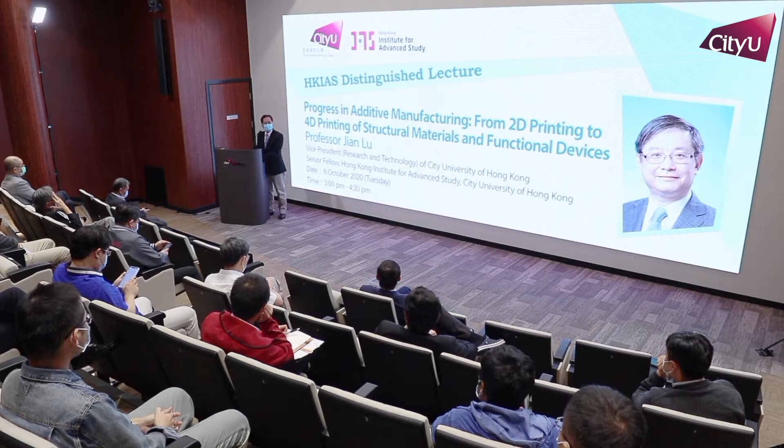And today we are very happy and honored to invite our Vice President of Research and Technology, Professor Jian Lu, to give a HKIAS Distinguished Lecture. Professor Jian Lu is a chair professor in the Mechanical Engineering Department at CityU, and his primary research interests are advanced nanomaterials and their integration in mechanical and biomedical systems by using the combination of experimental mechanics and mechanical simulation.

He has also branched out into several other interesting areas, including surface science and engineering, biomechanics, residual stress, and nanomechanics. And he has published more than 360 papers in SCI top journals, including Nature, Science, Nature Materials, Nature Communications, Science Advances, Materials Today, Advanced Materials, PRL, Additive Manufacturing, Journal of the Mechanics and Physics of Solids, etc.

And Professor Jian Lu has received the French Knight of the National Order of Merit and French Knight of the National Order of the Legion d'Honneur in 2006 and 2017, respectively. He was elected as a member of the National Academy of Technology of France in 2011. Also, Professor Jian Lu received the Guanghua Engineering Science and Technology Award from the Chinese Academy of Engineering in 2018. He has also been elected as a fellow of the Hong Kong Institution of Science in 2013, and he's also a senior fellow of HKIAS.

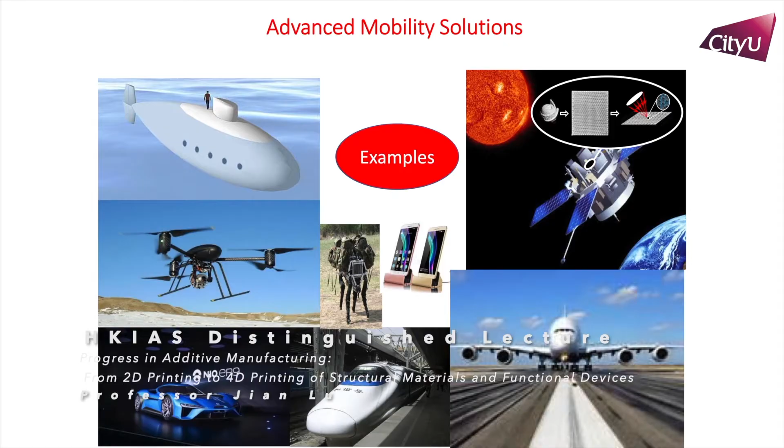So additive manufacturing is one of the key tools for advanced mobility solutions. As you all know, for structural materials, in addition to civil engineering, the main application field is mechanical engineering. So we always try to find higher efficiency mechanical systems, such as marine systems, space, aircraft, cars, and high-speed trains, and also all the mechanical or moving parts, such as smartphones. Today it is a very important element in our daily life, and it's very important to have a lightweight solution for smartphones, to add more chips or more battery in our smartphone.

So the major challenge for structural materials we basically need to solve is how to manage the strength and the ductility, these two conflicting properties. As we all know, quite often when we increase the strength of a material, the ductility drops. With additive manufacturing, quite often we can solve the problem because we can produce a component and a structure with tailor-made properties, where they need strength or where they need ductility.

So I would like to introduce first a little about the activity of the research center in which I work. Basically, when I joined CityU, I created this Center for Advanced Structural Materials. Today we have different faculty members, but we mainly work on the multi-scale mechanics of advanced materials. The materials we study are high entropy alloys, intermetallics, and metallic glasses. We have our expert Professor C.T. Liu here. And personally, I mainly work on structural nanomaterials, supra-nanomaterials, and 3D printing.

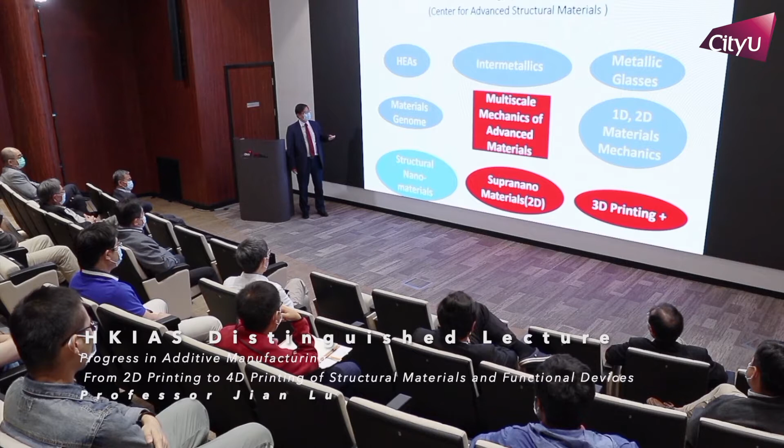Of course, we also work on some generic tools such as the material genome and 1D, 2D material mechanics. So these are the major activities in this research center, with 7 active faculty members who are core members of this center, but also another 6 or 7 faculty members who join as normal members.

So what's the major problem for structural materials and for the materials of the future? I recommend you go through this interesting book. One of the authors is here, Professor David Srolovitz. I saw your name here. So most importantly, the materials I work on, which I will present here, metallic materials, are so-called old materials.

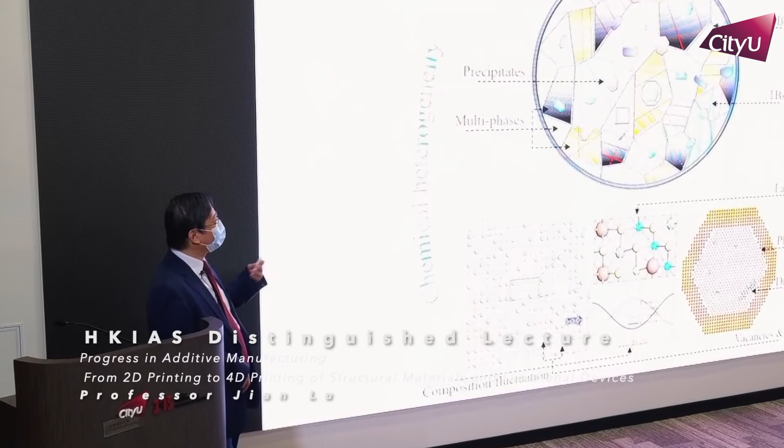So if we go down to the atomic level, basically what we try to do in material science, and particularly in structural materials, is how to generate or how to manage the heterogeneity in this material. Okay? The 3D, 2D, 4D printing allow us to generate all this kind of heterogeneity because it's possible to use additive manufacturing to create a totally new material by combining different types of material with different properties. But generally speaking, we have chemical heterogeneity, topological heterogeneity and physical heterogeneity.

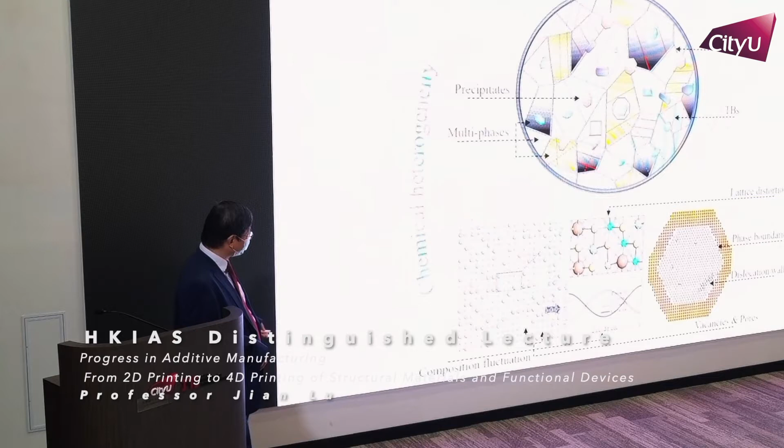Okay? So what we know in the past in material science, particularly for metallic materials, is that we can generate precipitates, and with nanotechnology we generate precipitates at the nano level. Another issue is multi-phase, grain boundary, twin boundary. Then if we go down to another scale, at the atomic level, we can generate composition fluctuation, such as high entropy alloys. So we can easily generate this kind of distortion, and also we have lattice distortion.

So when you insert different materials with different atomic sizes, then locally you generate a lattice distortion for a normal structural material. Of course, we can also have other defects such as vacancies, pores, dislocations, phase boundaries. All these can be managed. So we can say today, with different manufacturing tools and material processing tools, we can try to manage and organize all this for the final objective of optimized materials, components, devices and structures.

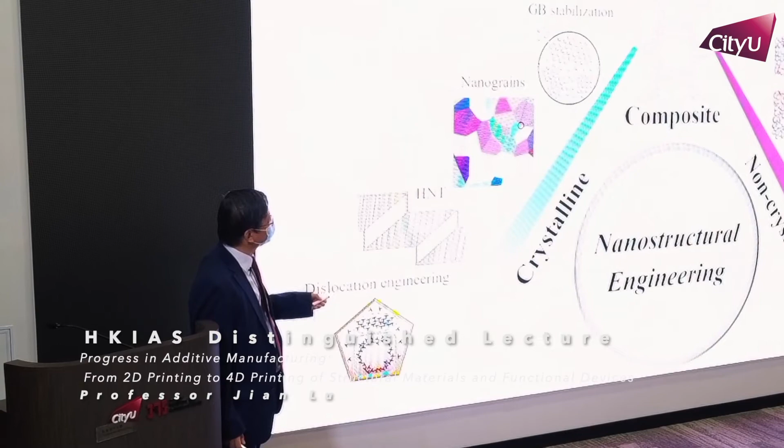So basically, for the materials I will talk about today, we mainly start from different types of materials. We can call it nanostructural engineering. So we can start with a material like a metallic glass, without any order inside the structure. Then if you partially organize the order, you may have a nanocrystal with glass. On this side, if you generate grain boundary stabilization, we can generate local heterogeneity, and also hierarchical nanotwins are another type of nanostructure.

We can manage to have high strength, high ductility, and of course, generally speaking, we can say it's dislocation engineering, how to manage the dislocations inside a small domain. This domain can be created by 2D, 3D, 4D printing.

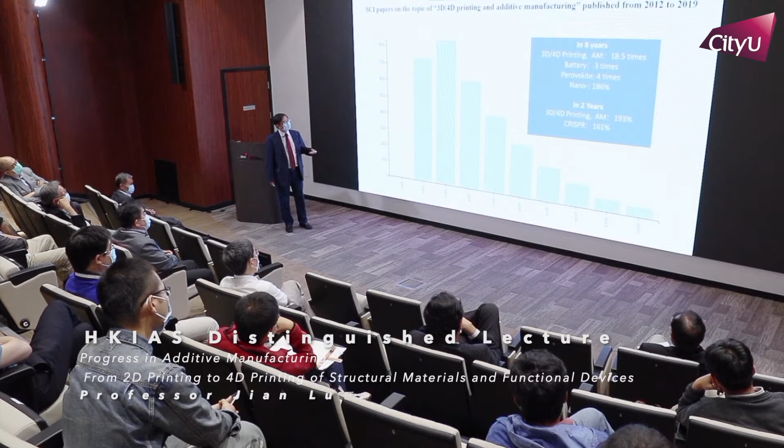So everybody talks about 3D printing, 4D printing, how it has become a very hot topic. So how hot is this? If we look at the citation index, we can see in 8 years the publications have increased by 18.5 times. I take other so-called hot topics like battery, 3 times, and perovskite materials, 4 times. Nano is already quite mature, so in 8 years, less than a 200% increase. Even in 2 years, it accelerates, as you can see here. Additive manufacturing, 3D, 4D printing publications have roughly doubled in 2 years.

So I take another very hot topic, CRISPR in biology. In 2 years, it's only 161%. So why is this field so hot? Because it gives material scientists, mechanical engineers and designers the possibility to create totally new materials with different ways to put the material together. So for this reason, it has become a very hot material and process.

Of course, we generate tons of methodologies to put the material together. For this reason, it's not like other fields. We have not yet focused on some particular process. Every month there's a totally new technique developed for the creation of another type of material, but it's a very interesting area and an interesting period for young people, because when you start some process, it's interesting to work in. But additive manufacturing actually is quite old.

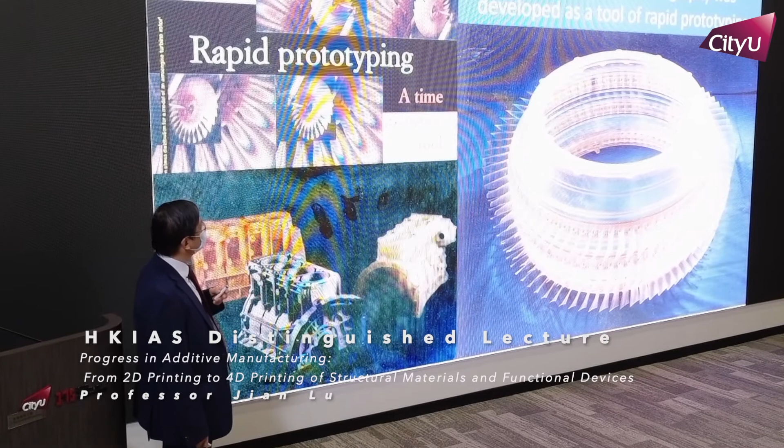Personally, I don't talk about coating, welding, all these kinds of processes which are very close to today's so-called additive manufacturing, because I have worked on residual stress, as Professor Huang said, for more than 35 years. Starting from day one, I worked on layered welding for nuclear plant preparation. But the first time we really called it rapid prototyping was in the 1990s. In the 1990s, we developed different photoelasticity techniques to produce 3D structures and generate photoelasticity to better understand the stress applied on a complex mechanical system.

At that moment, we used the so-called stereolithography, which is a polymerization with ultraviolet light. We can polymerize locally, point by point, and build the 3D structure. That technique was largely used in the automotive and aerospace industry for checking stress—just rapid prototyping to validate design concepts.

But today it's totally changed. This is a photo I took last year in Frankfurt, at the largest exhibition for additive manufacturing. We organized a Sino-German workshop there, and at the same time I visited the floor.

As you can see today, how complex real metallic structures can be produced. This is, say, a one-piece turbine structure that can be produced by additive manufacturing.

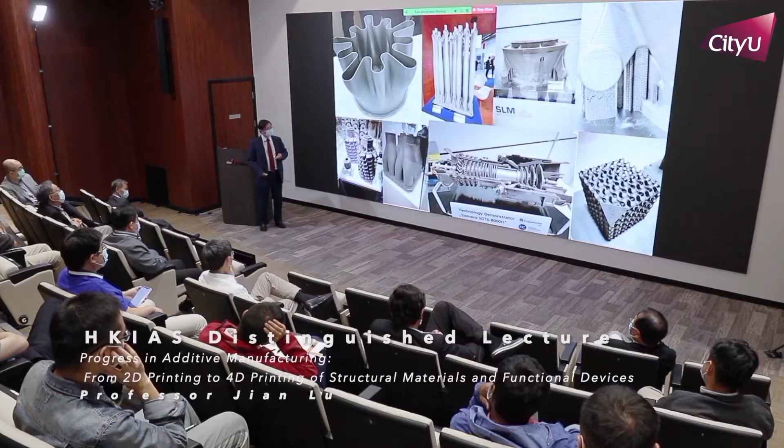For this reason, we are also working on this field—25 years after I first studied stereolithography for rapid prototyping. And of course, I've always studied residual stress for more than 35 years. So I feel now I'm on the right ground for my research.

So what's the future development of 3D, 4D printing? In my view, the most important thing is the ink or powder design, because this is the basic element to build the structure—the brick, which can be at a nanometer level or larger. But this is the very important element.

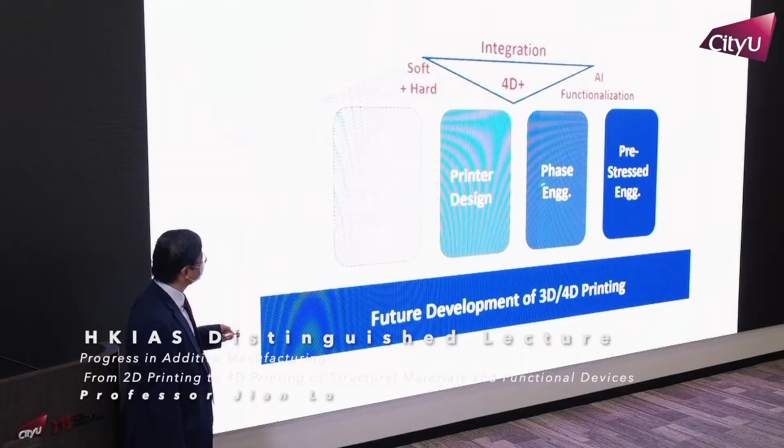Then there's the printer design—the machine is different from classic tooling machines or other machining equipment. It's also possible to develop the material itself, which to me is phase engineering. And we need stress engineering to manipulate it, because when you put different types of material together, due to the difference in thermal expansion coefficient, you get a totally different stress inside the structure. Before, when casting or forging a structure, the gradient wasn't so high in terms of composition and stress.

So what can we achieve if we're able to produce this? First of all, I think in the future we will have more and more soft material combined with hard material. As I said, sometimes we need strong material and sometimes ductile material, but it's very difficult today to combine them. With additive manufacturing, it's possible to put very soft material together with very hard material.

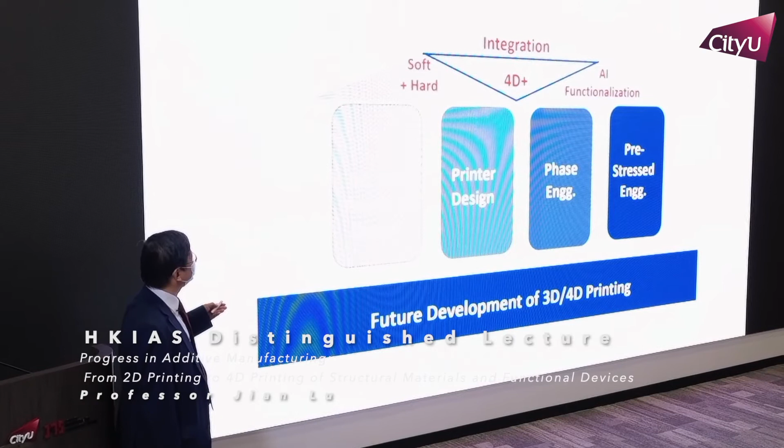Then with 4D+ printing, we'll be able to develop integrated solutions, and with artificial intelligence we can generate functionalization. So the whole system will change—not only the manufacturing process, but the whole of life, because we can produce not only mechanical structures but also soft structures. So I'll show you some soft structures produced by 4D printing.

Now I move to the supra-nano structure material—what I call 2D additive manufacturing. The example I'll show you is metallic glass combined with very small nanocrystals.

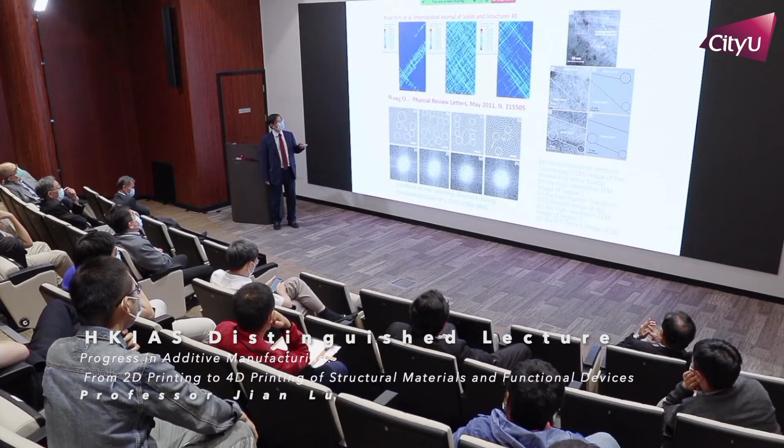Why did we have this idea? Ten years ago, based on simulation, we observed that if we can mix two materials at the atomic level with the same composition—say with only 20% difference in mechanical properties—we can generate a so-called multiple shear band failure mechanism. Because for metallic glass, it's like normal glass: once failure initiates, it's very difficult to stop.

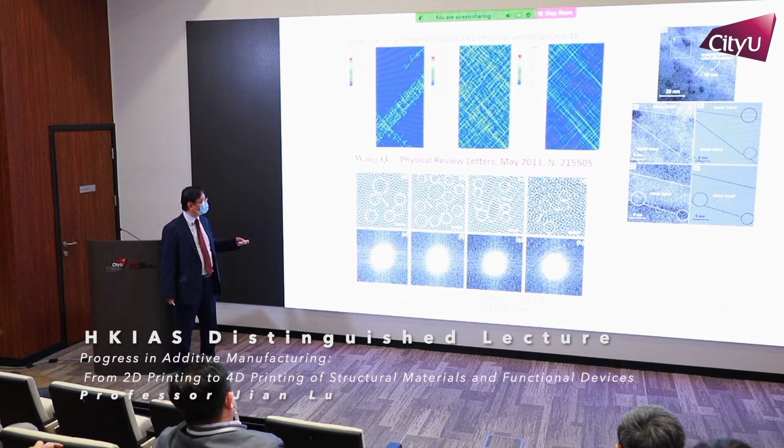But if we're able to generate a structure that naturally produces multi-shear bands, then we can solve the problem. We tried heat treatment to generate a material mixed with glass and nanocrystal, but it's very difficult because thermal heat treatment is hard to manage at the atomic level. For this reason, we only observed some change and some mixture, but it was very difficult to distribute homogeneously across a volume.

Then we tried to better understand the material with its heterogeneity. We developed a dynamic micropillar test and fast beta relaxation to better understand the relationship between heterogeneity at the atomic level and mechanical properties, especially shear band initiation. It was quite difficult, so we switched to a new type of material: supra-nano structure.

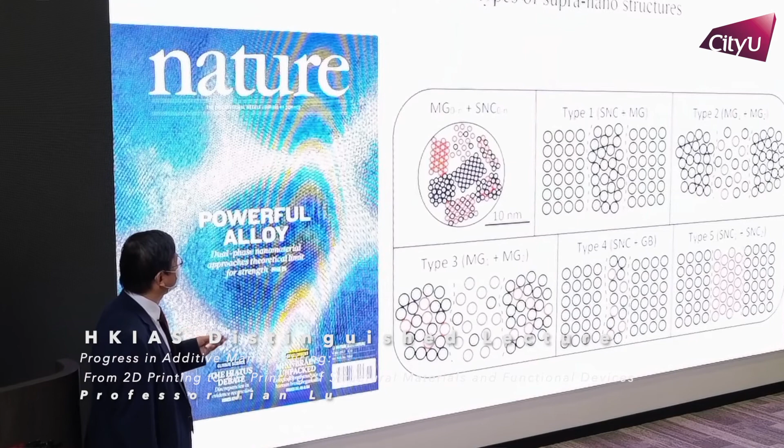At the beginning, we tried to produce this supra-nano structure with two metallic glass mixtures, trying to obtain a material with nanocrystal and metallic glass. But it's quite difficult to produce this because when you have two materials with the same composition, either it becomes nanocrystal or it remains metallic glass. So we designed a process where if we manage the composition properly, we can obtain this structure.

So the blue part, as you can see, the atoms are aligned in a regular manner, and this is crystal. The size of the crystal is only 6 nanometers. Then the yellow part is metallic glass.

So we have successfully obtained this structure, and surprisingly, the mechanical property in terms of strength and deformation capacity is much higher than the magnesium-based alloy, and even much higher than the magnesium-based metallic glass, which is reputed to be very strong compared to other materials.

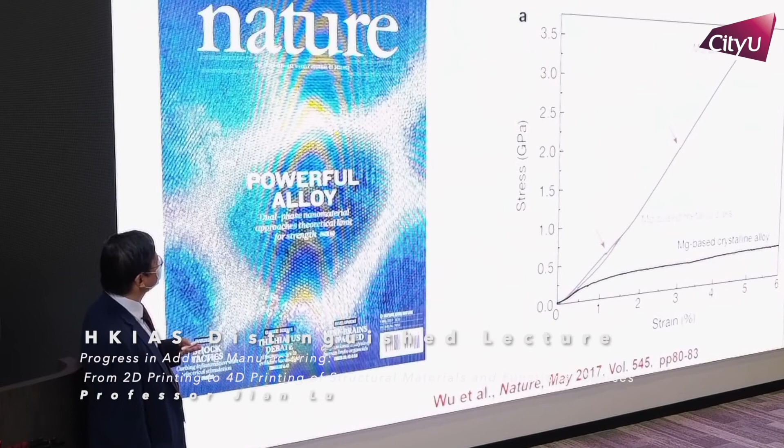So then we tried to understand what's happening in this particular material. This is one kind of additive manufacturing because we have a substrate - this is a PVD process, quite classic PVD. The main importance is how to design the substrate.

During the PVD process, what we successfully obtained is the phase separation. After phase separation, we have a material with crystal, and the remaining part is metallic glass. As you can see here, this structure is very nice - we have crystal distributed regularly, and metallic glass, amorphous material, also distributed regularly.

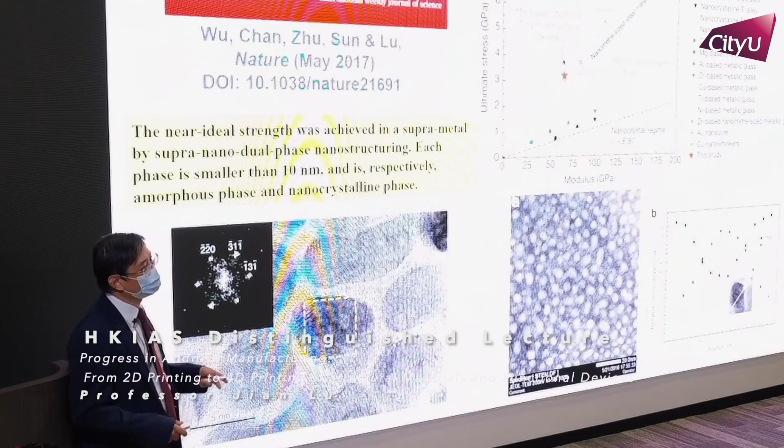If we do the chemical composition analysis, we can see at the center of the crystal we have a copper-rich crystal, and outside is magnesium-rich amorphous material. So basically we need two materials, and during processing we have phase separation, with two phases distributed equally and homogeneously inside the structure.

Compared to the theoretical limit of the material, which is Young's modulus divided by 20, you can see the newly created material is very close to this theoretical limit. Before our study, the largest samples close to the theoretical limit were 8 nano, 75 nano, and 220 nano. Here it's still small, but it's 1.3 micrometers.

So what's the application of this? I'll show you one example: the orthopedic implant. With the aging problem in the world, we have more and more fractures, and every 3 seconds there is one hip fracture in the world.

When the average age increases, the problem comes to all the patients. So the problem is when you have a bioimplant, today we mainly use titanium or stainless steel as the material.

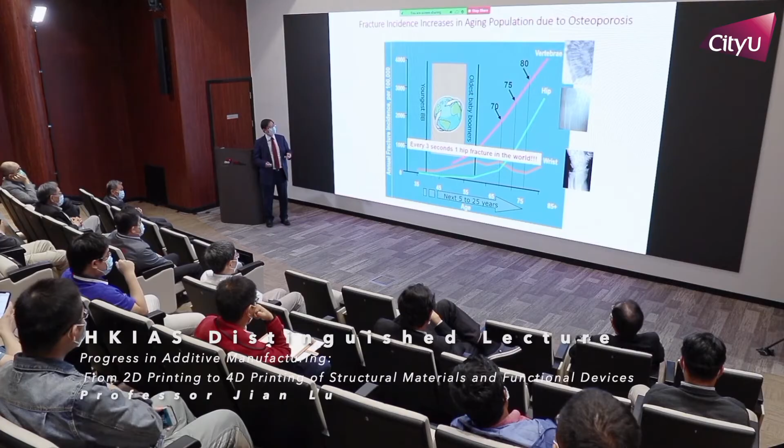But you may need another operation, for example if you have a fixation of the bone, to extract the material. So the ideal case is to develop a biodegradable material.

Magnesium is a very good candidate for this, but the only problem is the strength - it's a very weak material. So how can we have a very strong material? We combine pure magnesium or magnesium alloy with this additive manufacturing 2D added structure that can drastically increase the strength of the material.

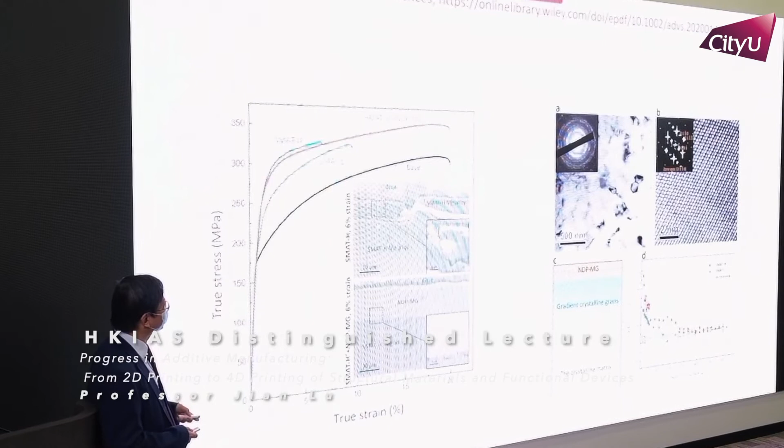So you can see here we use this base material, which is already a very strong alloy. If we use surface mechanical attrition to generate the nanomaterial plus this coating, we roughly double the yield stress without sacrificing any deformation capacity. This is a gradient structure, giving us excellent biocompatibility and strength of the material.

So for this kind of combination, we are doing large animal tests. I hope very soon this will move to human testing and the market for the biodegradable implant. In terms of strength, it's roughly 10 times the base alloy, and wear resistance is increased by 50%, because in this particular structure the friction coefficient has been drastically reduced.

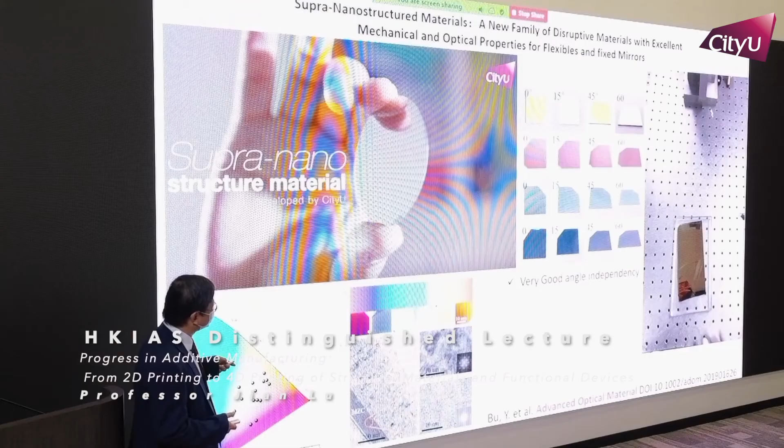Another example of this technology: today the smartphone is a very popular application. Here is one example - you can see we can coat the structure with an optical coating in different colors. But more importantly, this substrate is a polymer substrate, so tomorrow we can imagine a soft smartphone that rolls together. As you can see here, it can be rolled easily.

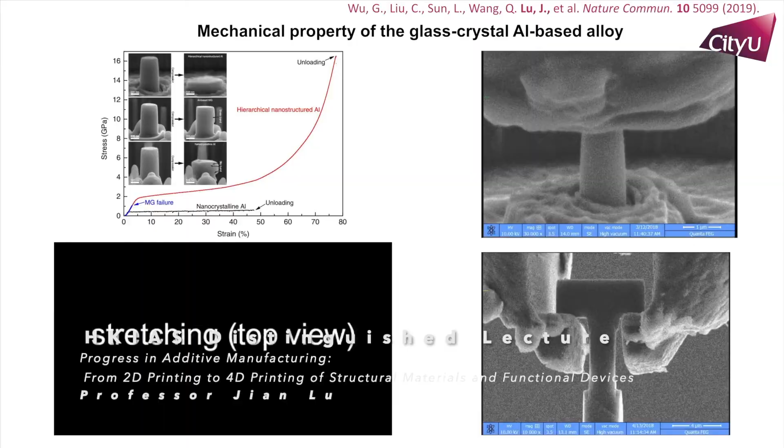And how to have a very deformable structure. So this is one example. It's an aluminum-based alloy using similar technology. You can see here the deformation capacity is very high for this aluminum. During the deformation, compression and tensile test, this material is very ductile. Compared to the previous material, the grain size is smaller than 10 nano, so without any dislocation. Here it's 10, 20 nano, then the grain has a capacity to deform. For this reason, this material has very strong strength but with high deformation capacity. You can see here, when you do the compression test, we never see the crack. So from here, a very high deformation capacity.

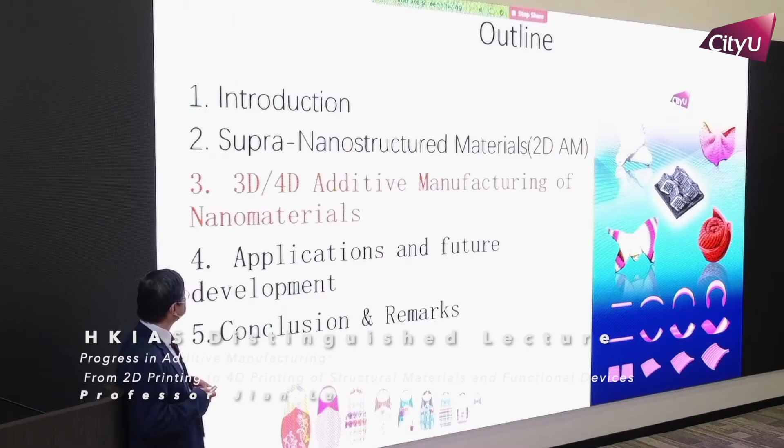So now I move to the 3D, 4D additive manufacturing of nanomaterial. Basically our roadmap is to work on 3D printing plus nanomaterial. The sector for which we work is high added value sectors, which are aerospace, space, and biomedical.

So basically, we try to develop a new supra-nano alloy, as I described before, and right now we can produce up to 50 to 100 micron thick coating. The paper we show you is around 10 micron, but with process development, we are able to produce, for example, for a 1 millimeter thick sheet, we can add 50 micron on each side of the material, so that is a quasi 3D structure, especially for aerospace or other lightweight solutions. We also develop new processing for ink and associated sintering process after 3D printing.

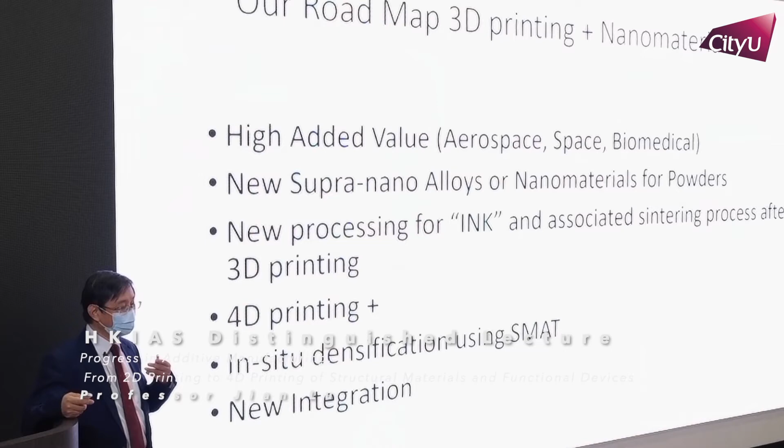Of course, we have 3D, 4D printing plus - I will show you what this is. Also in-situ densification using surface mechanical attrition to enhance the fatigue property of 3D printed metallic material, and also new integration.

So what is 4D printing? Basically the 4D printing concept can be used for all types of material - metallic, ceramic, and polymer material. For the metal, we can use shape memory alloy, or elastomer derived ceramics, or shape memory polymer, hydrogel, all kinds of material. And why do we call it 4D?

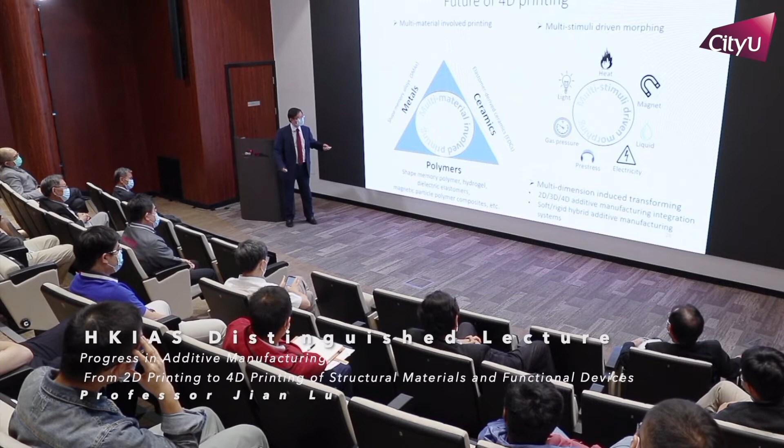Basically you can print in a 3D structure - the structure is always 3D. Why is it 4D? 4D means we can add a multi-stimuli driven morphing - you can change the shape. If you add light, if you heat it, if you add a magnetic field, if you add a liquid - I'll show you some examples. Electricity, prestress, gas pressure. So you design something with a programmable structure, then you can obtain another shape than the initially printed structure. For this reason, we can say it's 4D. Of course, I don't say if you combine this, that becomes 5D. So basically 4D means a 3D structure plus one stimulus or multiple stimuli - you can modify it in a programmable manner.

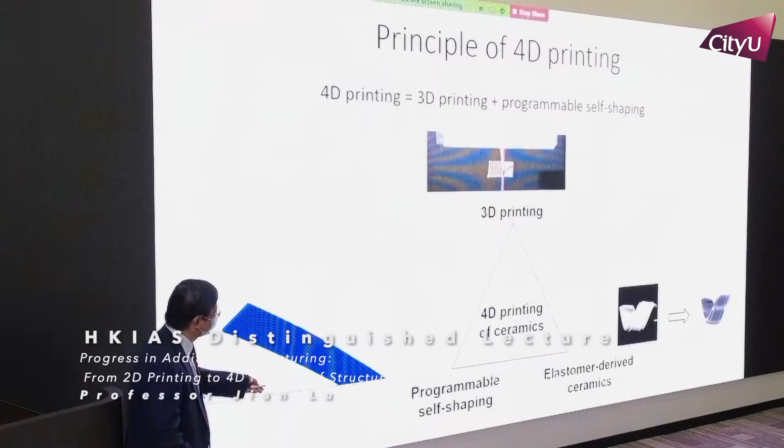So if we come to ceramics, it's basically 3D printing plus programmable self-shaping. Self-shaping means when you print something, during the sintering the material becomes like this. At the beginning it's flat, due to the heterogeneity, anisotropy designed and embedded in the structure, then you have the final structure like this. This work has been widely reported in China, in the United States, or even in Russia. So basically, the first 4D printing ceramics - we print a structure, and then we have a structure that can fix the shape. Then we do the sintering of the structure. This is primarily a ceramic origami structure with a pre-strained precursor.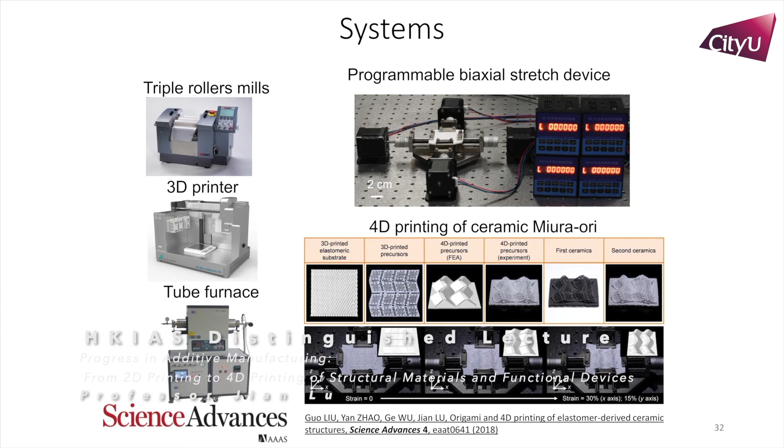So these are different systems we use - material preparation, 3D printing, furnace, then we can add the biaxial stretch device. Then we can print this structure on this pre-strain device. Then when we relax this pre-stress, the structure can become very complex.

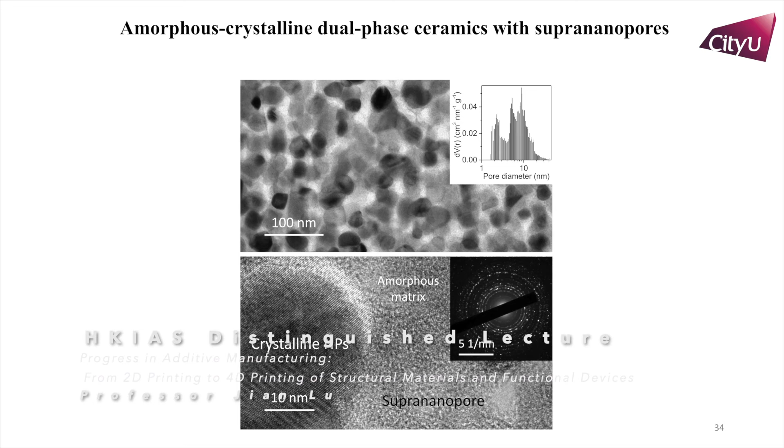So basically, we have designed a super elastic precursor that can be deformed very easily. You can see if I only do the sintering on part of this structure, I can have half soft like this and half hard material. So the material obtained is also a dual phase material with nanoparticle crystals of 20, 30 nanometers, and also an amorphous matrix plus nanometer pores. The nanometer pores can probably also be used for catalysis because the catalysis can go into this nanopore.

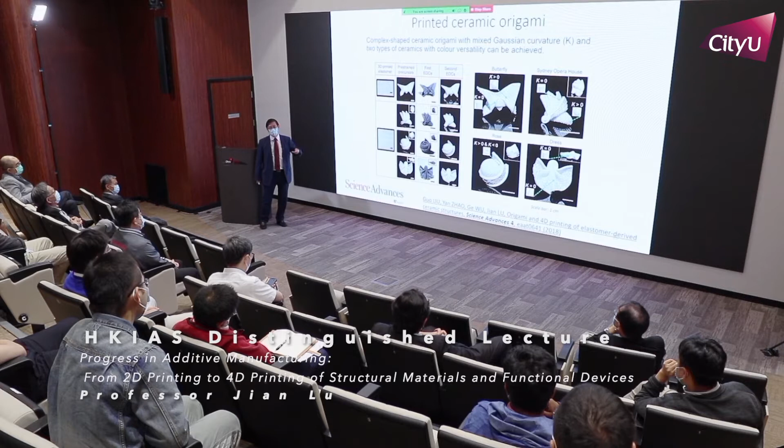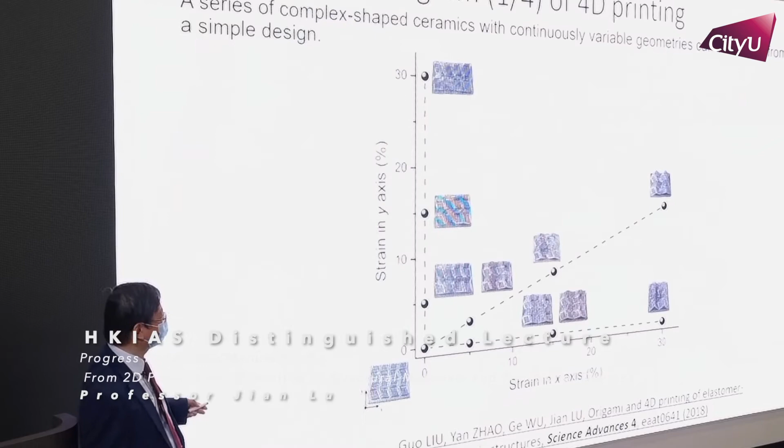And then we can imagine we can print a structure - so how complex can the structure be. This is an example where we print the precursor as a sheet, then we deform this and sinter it, then we obtain this complex shape that cannot be obtained by a normal 3D printing structure. It's origami - if we deform the substrate we print this structure on, if we deform in that direction, then after sintering it's this shape. If we deform in the y-axis it's like this, basically a symmetry of this, but if we combine with any angle, you can imagine we can obtain very complex structures.

So this is one example of how to develop a 4D printing structure. So basically, we print a structure with articulation points. You can see here, okay? Then we print this structure on top of a substrate, and this substrate is deformed during the printing, okay? You can see here, during the printing, so we deform, okay? Then we print on top of this.

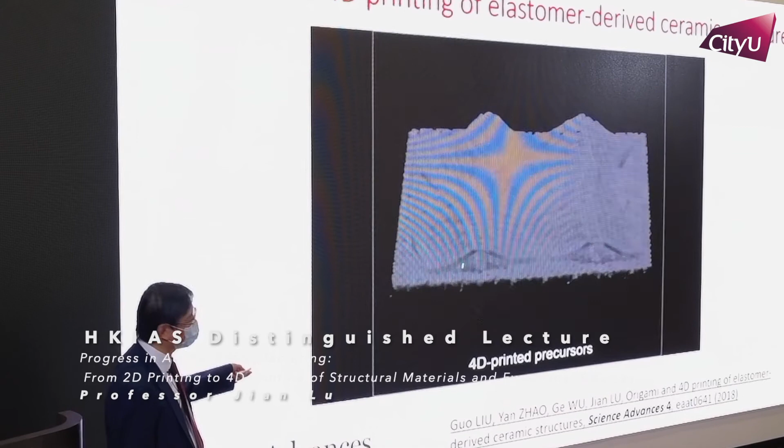So as you may see, if it's bi-axis, we can generate many types. When you relax this, then you can obtain many combinations of the structure. So that's for the ceramics. But how about the mechanical property?

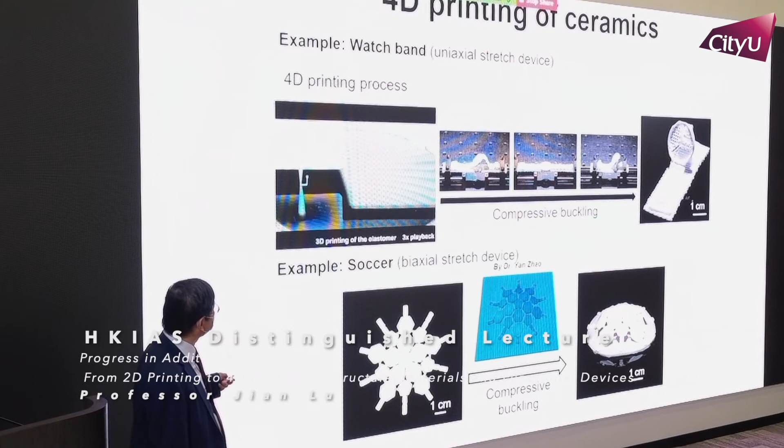So basically, with the 4D printing ceramics, we can print a multi-layer system with prestress. Then during the self-assembly, this is by simulation, but the reality is also the same. And also we can print a structure, and then this structure can have the shape we want if we anticipate having a different type of articulation point. Okay.

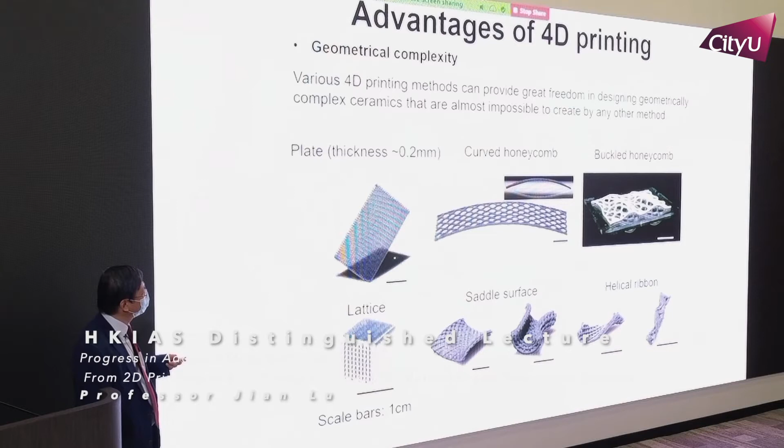So what's the application for this development? Okay. So the advantage of this 4D printing is we can basically print all kinds of complex shapes of ceramics. So that may be interesting for chemical engineers, because tomorrow if you want to put your catalysts in many structures, then it's possible. You have plenty of choice. Of course, here we have hard materials, which are ceramics, but we can imagine we can also print a soft material that can take any type of shape.

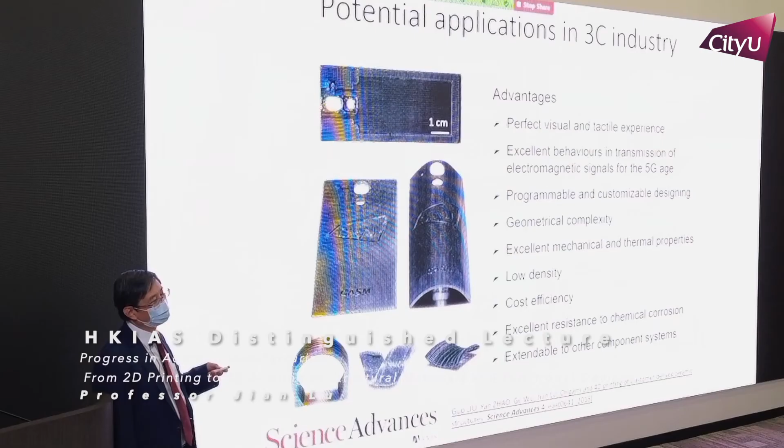Of course, another application is for 5G, because as you know, the case in the past was a plastic polymer material, and today is mainly metallic material, and tomorrow for 5G with metallic material, the electrical signal will be shielded by the structure. So we are looking for a new case for the future generation. Either it's a polymer, so we come back to the Nokia solution, or it's ceramics or glass. Glass, the weight is quite high.

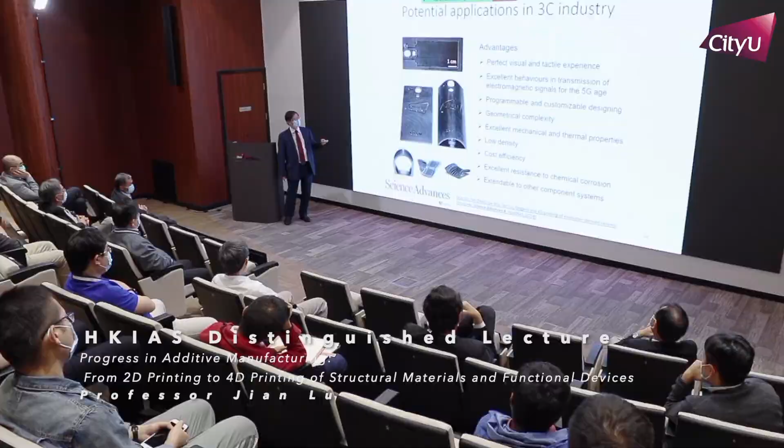Then for ceramics, the challenge is how to build ceramics with different shapes, and also how to build a flexible system. You know, today the screen is a flexible screen, so we can imagine we have a hard part in ceramics, and in between a soft ceramic with super elasticity, so we can easily deform, and these ceramics should also be quite strong, because the mechanical property should be at least better than glass. Otherwise, glass may be a better solution.

But today, there is much competition between ceramics and glass. There are also people working on prestressed glass, okay, with a thickness of say less than 100 micrometers. So these two materials will compete, but as I said, we can also print glass. So this is the same generic solution, and tomorrow we can have different shapes if we print the structure with different anisotropy and heterogeneity, and after sintering it takes the shape we want.

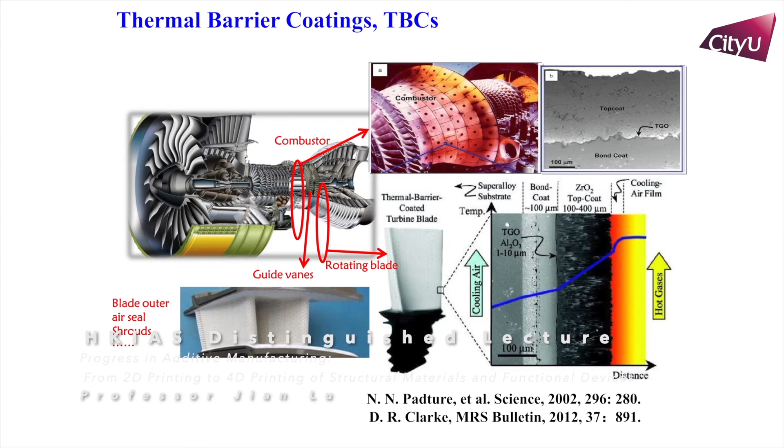Okay. Then another application is thermal barrier coating, or directly printing 3D ceramic turbine blades. So as I said, I showed you a small engine directly printed by 3D printing. But in future, we can imagine all these stages printed together with a huge machine. Parts will be ceramics and parts will be metallic material.

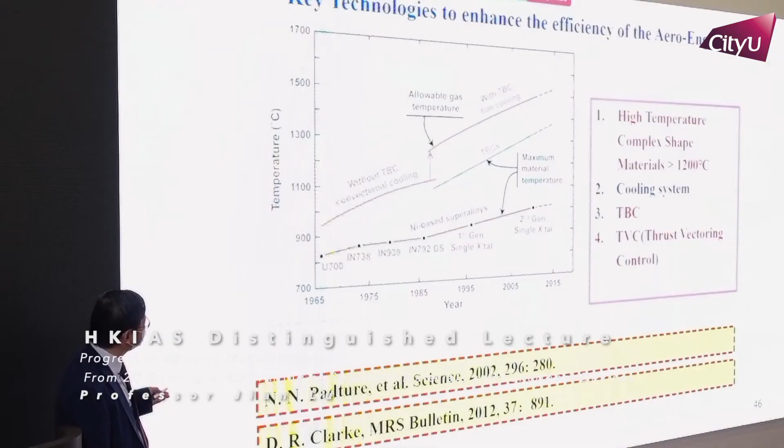So why do we need thermal barrier coating? As you see, we have Professor C.T. Liu working on superalloys. So in more than 50 years, 55 years, we basically increased the working temperature by 150 degrees. So it's very small progress, but if we coat the structure, then the working temperature can be increased by 200 degrees. Then if we have a smart cooling solution, the working temperature can be further increased by another 200 degrees.

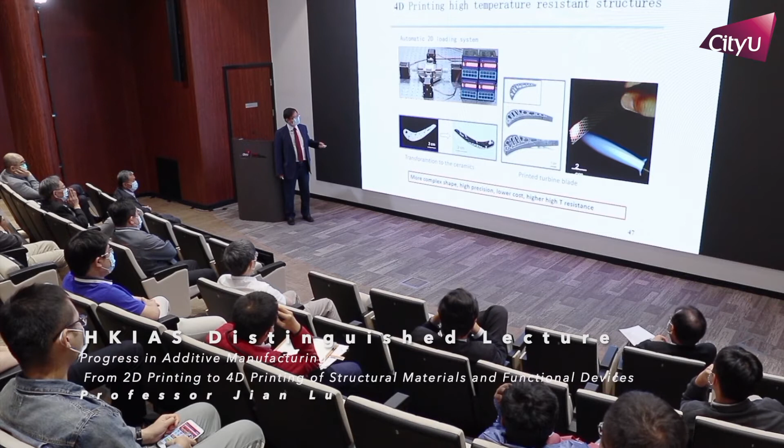But today, producing a structure with a very complex shape in ceramics is very difficult. But with our solution, I think in future it will be possible. So we try to do something. So you can see we can have a very complex structure. This is work from 2 years ago, and our new work has not been published, but today we can have 10 micron precision for this structure. And this structure is highly resistant to high temperature shock.

So we do believe in future we may have a very complex shape in high temperature resistant ceramic structure. And also we can have some structure in space. You know, in space the temperature gradient is very high. When you are facing the sun, the temperature is very high. The other side is very cold.

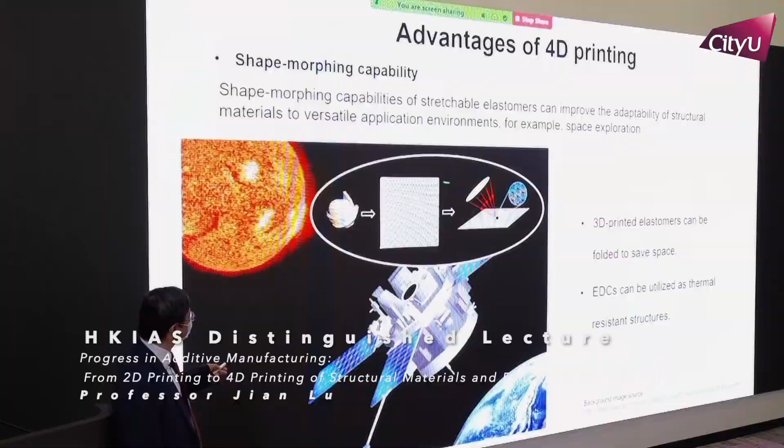So how to develop a system that resists this kind of thermal shock is also possible with 3D or 4D printing structure. So we can imagine we can bring our structure into space and produce whatever we want, either for thermal shock resistance or for other things. And also we can have lightweight amorphous ceramics, and also for any high temperature applications. And another application is the shielding of the neutron.

So I see Professor Kai and all the colleagues. So today,

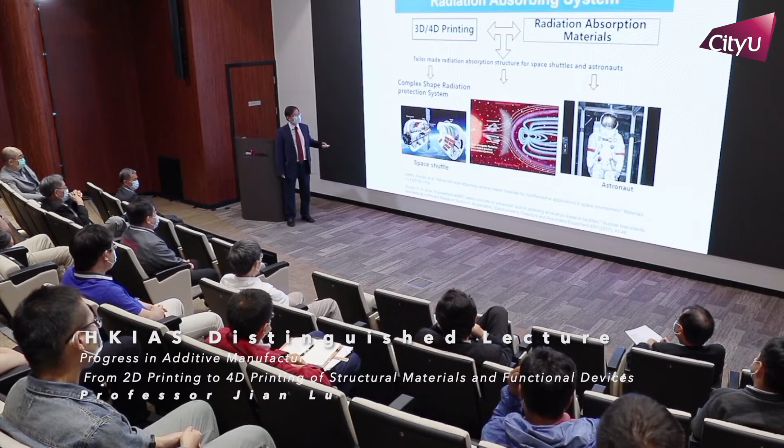In space, we have a lot of radiation of cosmic rays. Cosmic rays can damage the structure of the space shuttle, but also can damage the people. So if tomorrow we can produce a very light structure with the capacity to absorb the neutron, then we may extend the life of the space shuttle or less damage the astronaut.

Of course, we can also use this kind of technology for nuclear plants, but in the nuclear plant, we don't need such complex geometry, and we don't have a requirement such as lightweight structure. But in space, every kilogram saved is around 100,000 US dollars. So if you can save 10 kilograms to do the same thing, then you can save a lot of money and have more so-called working load for the other mission.

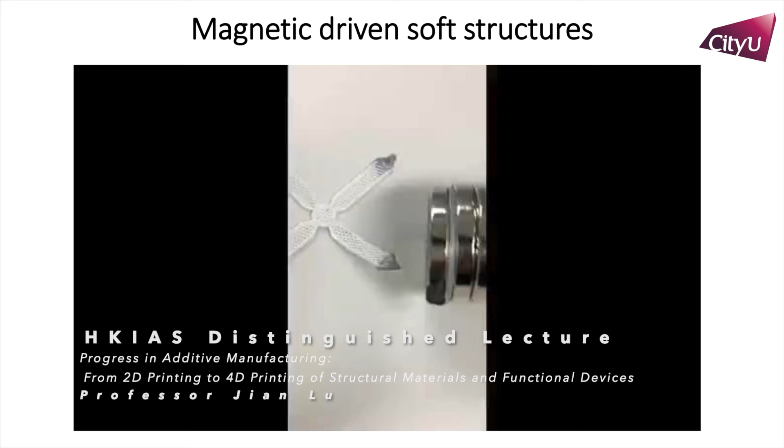So what's next? So the next is, as I said, what's the stimulus? What I have shown you is the stimulus due to the heterogeneity of different layers. But this, can I have this? This one is with a magnet. So with a magnet, you can generate any shape of geometry difference. And we also use this technology to prestress or enhance the mechanical property of 3D printed structures.

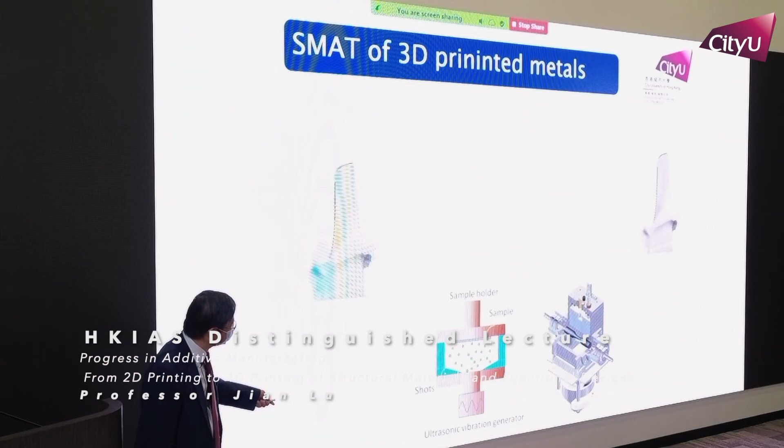The major problem of 3D printed structures today is the fatigue life, because due to the heterogeneity of the temperature during laser sintering or other types of high energy sintering, you have heterogeneity. It's very difficult to control. But using this homogenization technique, the surface mechanical attrition, we have done it on the fatigue sample, and we see the sample with a well-designed SMAT area achieves the desired strength. So this is to show the feasibility of this structure.

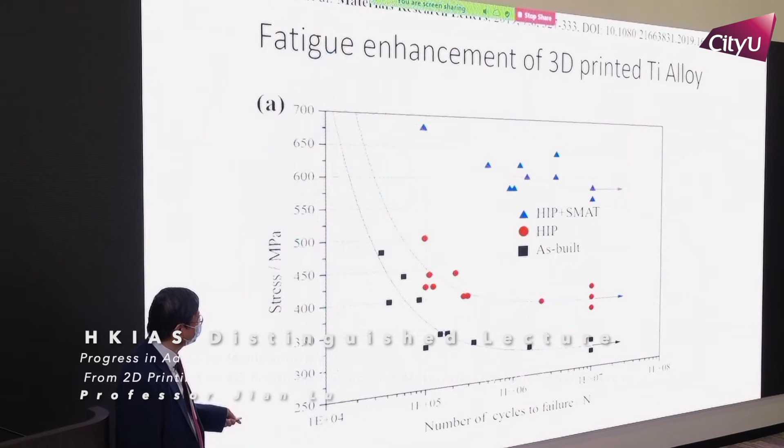So we 3D print the fatigue sample with HIP treatment. We densify the material and prepare the fatigue sample, and then we treat this fatigue sample using this technology. And you can see, compared to the as-built, normal 3D printing, the fatigue strength is only, say, 280 MPa, and after HIP it's a little bit better. But if we use HIP plus SMAT, we can roughly double the fatigue resistance. This fatigue resistance is very close to forged titanium alloy.

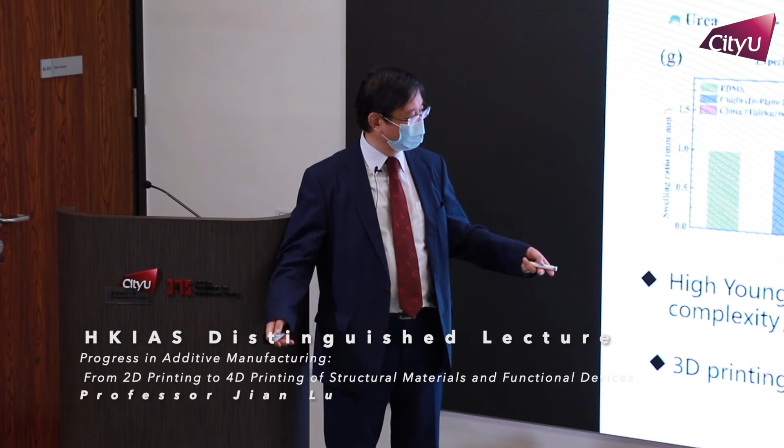So that means tomorrow we can have a very complex structure with very high fatigue strength, similar to the other technology, but with much more complex structure. And this is another example we can do. This is a direct-ink written shape morphing structure with rapid and programmable multiple motion. Here we put this structure in water, it becomes a 3D shape, and then we put it in alcohol, and it becomes flat. So the technology we develop is a very fast transformation.

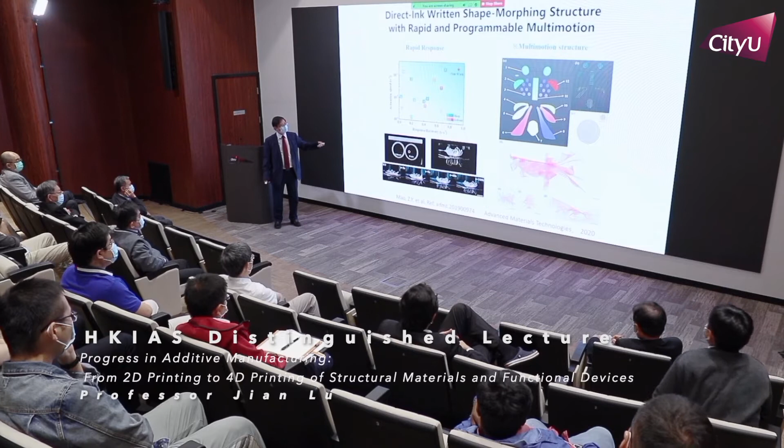This is another example. Can I have the movie, please? So again, we put it in the alcohol, it becomes flat. Then you can see here, this flow. We can design with different speeds of deformation, then we can have whatever shape you want to design. And here, we combine this ability to build a structure. We call it programmable multi-motion, because the motion of each component is different. So we design this without anything. It's a flat structure. Then we put it in water, then it becomes a red fish.

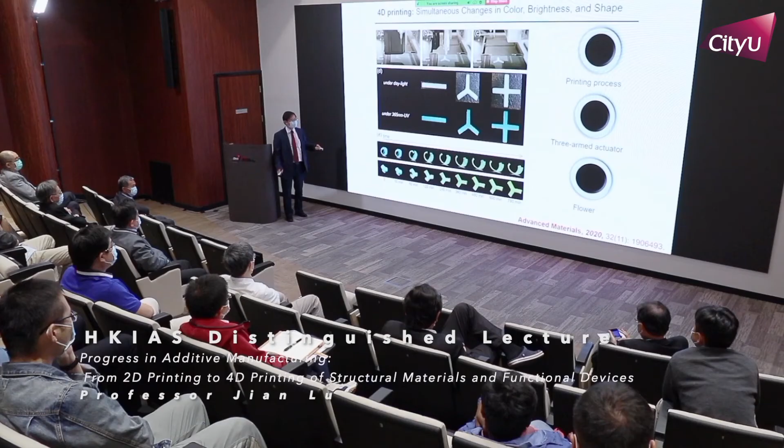With complex structure. Of course, if we put it in alcohol, then it becomes flat. So what else? Another example: we can print embedded different material inside. This example is a simultaneous change in color, brightness, and shape. In this particular case it takes quite a long time, more than 10 hours to change. As you saw, the previous solution can change the shape very quickly, really in time. But this one shows it's possible to change the color, brightness, and shape.

It's just to give you one example of 4D printing, because in a programmable manner, tomorrow we can build whatever the shape, whatever the property. We can build something sensitive to light, to other energetic stimuli, and then change the shape to go to the programmed shape you want at the beginning. So this is very important. It's not any shape. So we can embed the active layer, passive layer, different layers. Then we can obtain the shape you want by design.

So to conclude, additive manufacturing is a very powerful tool for the development of new design due to its tailor-made solution nature. This is very important. Tomorrow, if you don't care about the cost, basically we can tailor-make many things. Of course, we try to tailor-make artificial hearts, artificial livers, but we are still working on this. The question is how to solve the tailor-made solution. So 2D additive manufacturing of supra-nanostructured material can provide lightweight solutions for many space components, aerospace structures in magnesium, aluminum, and titanium.

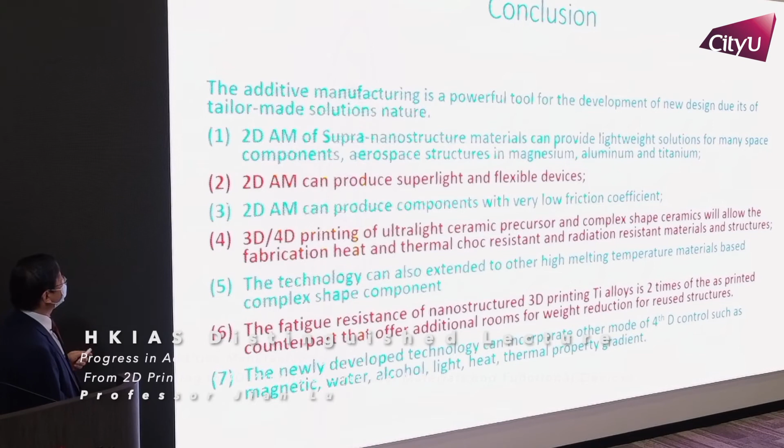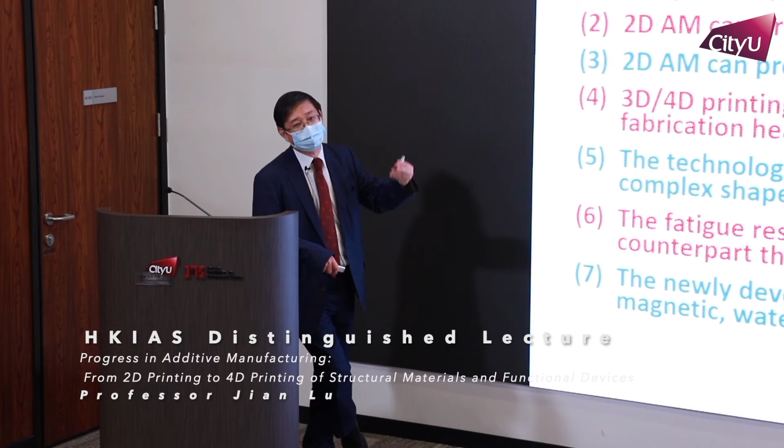For example, for titanium and aluminum, the mechanical property is much better, even with 10 micron, 50 micron coating. Then 2D additive manufacturing can produce super light and flexible devices. As I showed you, if we coat it on the polymer, at the beginning it's a very stretchable structure, but we enhance the Young's modulus of the whole structure. Then 2D additive manufacturing can produce components with very low friction coefficient. I call it 2D because the added part is 2D, but the component is actually also 3D.

Then 3D, 4D printing of ultralight ceramic precursor and complex shape ceramics will allow the fabrication of heat and thermal shock resistant and radiation resistant material in space, or even for the aerospace industry. Because if you take a flight every day for a very long time, you also get sick. I don't know if it's a direct link with radiation, but I know that may be a problem. The technology can also extend to other high melting temperature materials. We showed ceramics, but we can also do other high temperature materials with complex shape, like tungsten or other materials.

The fatigue resistance of nanostructured 3D printed titanium is 2 times that of the as-printed counterpart and offers additional room for weight reduction for reused structures, for example aircraft, and even for space applications. As you know, Elon Musk's SpaceX developed a technology to reuse the space shuttle. In this case, fatigue is an important parameter. Before, you only launched one time, so it was not a problem.

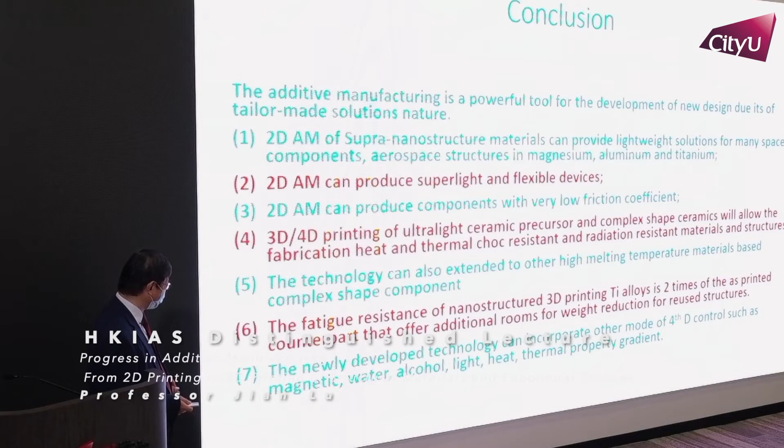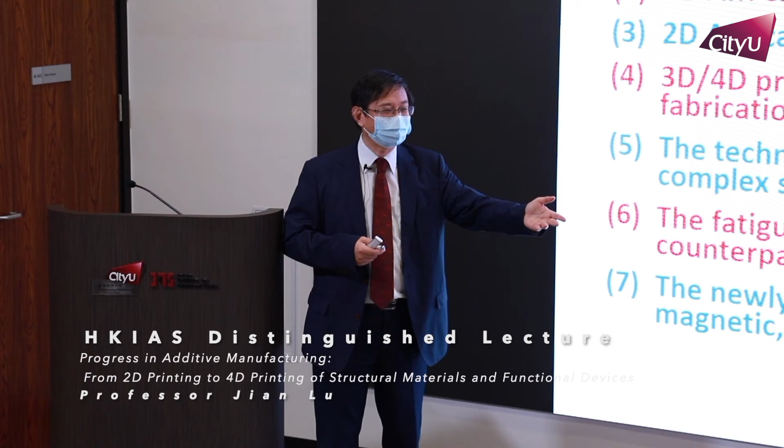The newly developed technology can incorporate other modes of 4D control, such as magnetic, water, alcohol, light, heat, thermal property gradient. Anything you can incorporate in the structure. That opens the boulevard for the creation of new materials. Any new material you can use in 3D printing, and the machines become cheaper and cheaper. One company in Shenzhen collaborates with us. How many 3D printing machines do they sell? 2 million, worldwide. So the machine cost is like our color printer. It's a 2,000 3D printing machine today.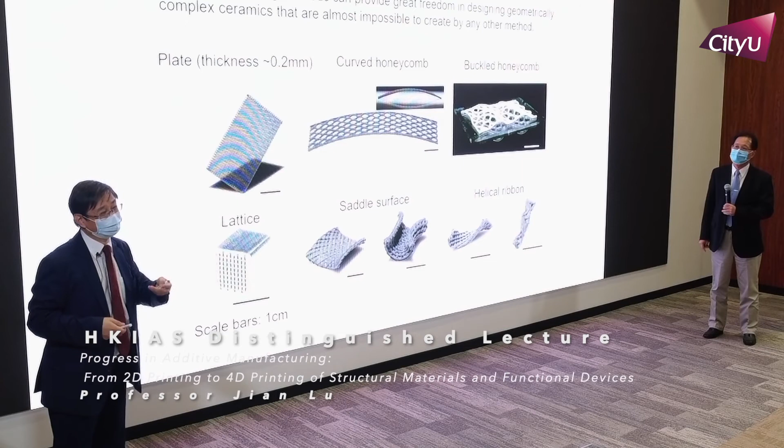It's like chips. In Intel, they have 50 people working on this residual stress issue. They call it thermal management, a very important issue. And for the mechanical system, we have developed different tools. In 1998, I led one project called ANSPED, European Network on Stress, Surface and Prestress Engineering. So basically how to take into account or introduce good residual stress in the structure to extend the life.

So today at Airbus, from engine to the structure, everything is prestressed. It's like glass. Glass 100 years ago was very easy to break. But today, we do the ion exchange treatment to introduce very high compressive residual stress on the surface. For this reason, the glass for our smartphone can be very thin. Today it's 500 micron, tomorrow will be 100 micron, and they even target 50 micron. So all these materials use prestress engineering to extend the life or performance.

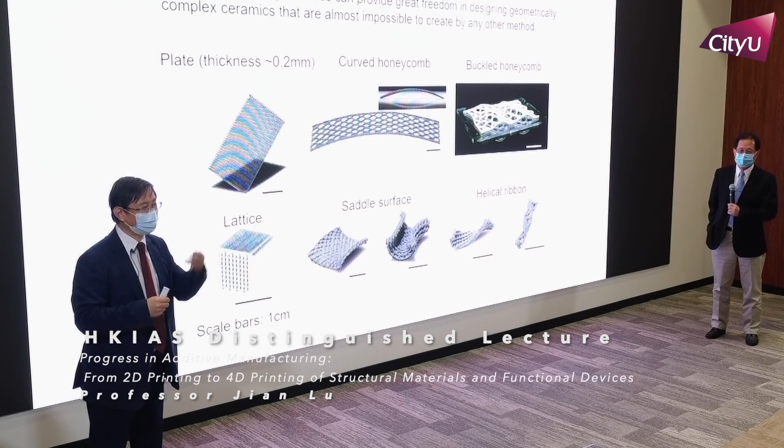My second question is related to your last slide. You show something you put in water and also in alcohol, and it seems like magic. Something can fold, can curl, and can flatten. So what was the mechanism?

Behind the mechanism is some structure, hydrophobic, with different properties in the material. When you put in the alcohol, that squeezes the water out. When you put it in the water, that structure absorbs the water. Of course, you can do the inverse, but you combine a hydrophobic material with another material. So that's related to the materials you are using, right? Yeah, we combine two materials: one absorbs water, another absorbs, say, alcohol.

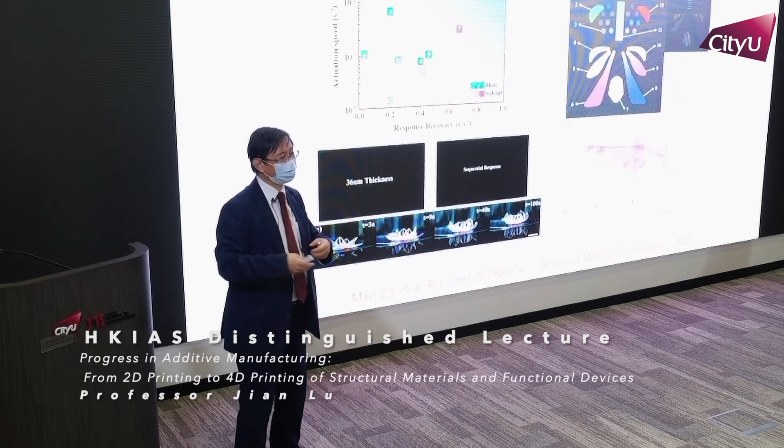What kind of alcohol? It's ethanol. But between ethanol and the water, they are actually quite... No, we put one recipient of water and another recipient of alcohol. So the water inside of the structure is quite minimal.

Okay, the president.

Your 4D printing, did you invent it, or is that common terminology? I didn't invent the term 4D, other people produced that. What we invented is 4D printing ceramics. The 4D terminology is not invented by me, it's invented by others, and I think it's misleading. According to Einstein, there's only 3D. I think we should call it flexible 3D.

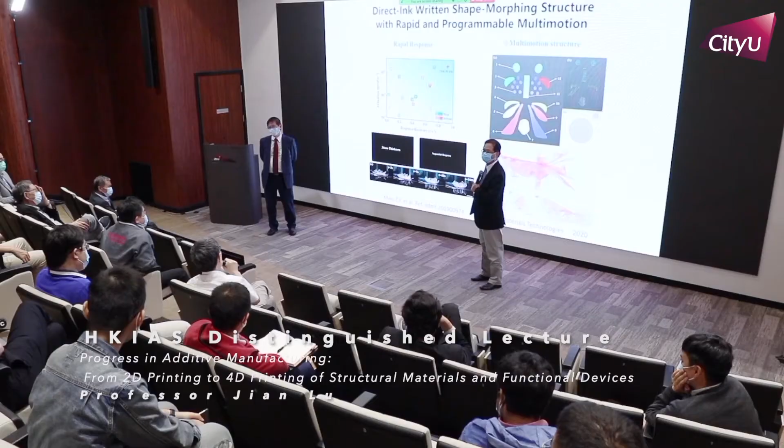Is that common terminology? Yes, people now commonly call it 4D, and it's becoming even more common, so we try to stop this. As I said, if you add another stimulus, people call it all 4D. That means a 3D structure can have a morphing figure, but in our living world there's no such thing as 4D. Unless you want to play some magic game.

You can print something with a magnetic property, and when they change shape, they change the magnetic field around them. So I think even with a magnetic field, it's still 3D. The fourth dimension is time. With time, as Professor Yang will say, if you have a stress, you have a relaxation of the stress, and with time that changes. But that's not shape, that's force.

Actually, we have one question - follow up on the president's question. So do you have 5D or 6D printing? No. As I said, we already stopped this 4D, 5D, whatever. We just say 4D means you have another stimulus to change the geometry. But if you have two stimuli, it's still 4D.

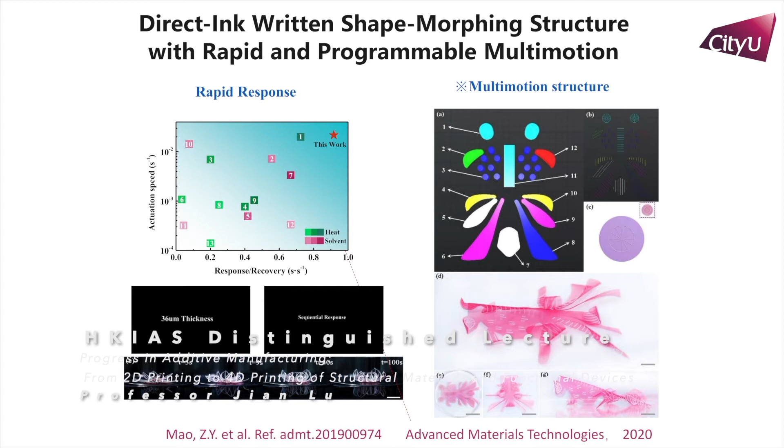So can you control this? Yes, you can control it. Of course there are some limits - you cannot fold it completely like something, but it's possible. If you have an articulation point, you can fold it completely. This one is without an articulation point. If you design an articulation point at the interface, then it can completely fold, if that point can change shape or rotate.

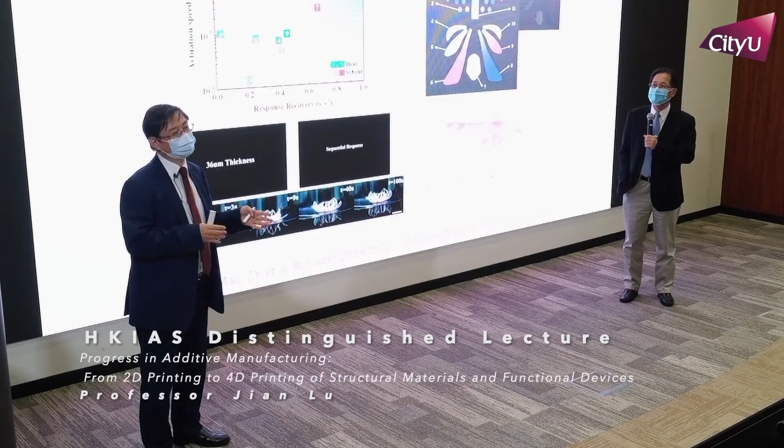Thank you. We have another question from Professor Solasson from France. You mentioned Young's modulus divided by 20 as a theoretical limit - what was it related to? It's basically, if we have a perfect material, the strength is roughly between... the Young's modulus is between 10 to 20 times the strength.

But right now the real strength is much lower because you have dislocations that facilitate motion, so usually the Young's modulus is 60 to 100 times the strength due to dislocation. In our material, since we don't have dislocation because the grain size is smaller than 10 nanometers - it's 6 nanometers - the structure has another failure mode without dislocation. For this reason, the mechanical property can reach a very high level.

Thank you, Professor Lu, for introducing us to such a big picture for 3D, 4D printing, which I think is indeed a very important direction for mechanical engineering. But I still feel that in order to make it really useful in real life, there are many fundamental materials problems inside - especially many of them are actually traditional problems, like in metal solidification or polymer engineering.

By the way, you described PVD as one type of 3D printing, which is quite creative. But it reminds me that Richard Feynman, the physicist, mentioned the ideal, ultimately, if we can build up materials atom by atom - it sounds like in your way it's also kind of 3D printing. So what do you think? What's the ultimate resolution limit for 3D printing?

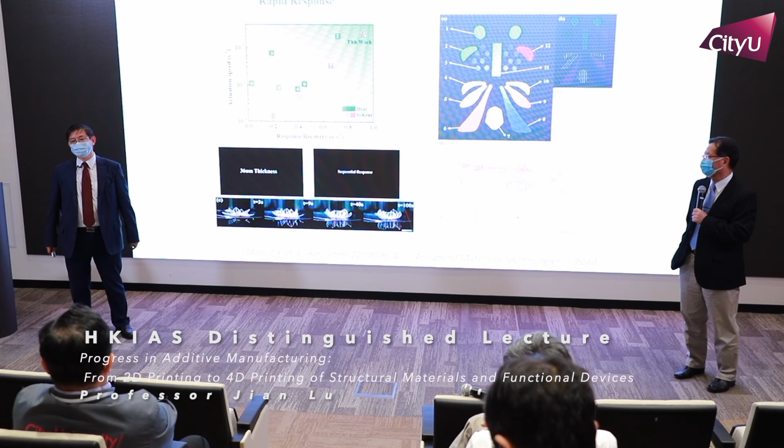Because I believe to achieve a balance in thickness, you said like 1 micron, but with nanometer-scale, if you use ALD you can do close to atom by atom. But I believe there must be some balance between the cost, the time, and also the printing efficiency. For this reason, PVD is quite a good process - some people produce flexible solar panels with PVD, so that means the rate can be quite high.

So today we work on different lightweight alloys, so tomorrow I do believe we can produce wings, at least for small aircraft, using this technology. Thank you.

So I was interested in this question of the limitation on the rapid response. I know you've looked previously at bistable and multi-stable structures. Have you tried printing and actuating bistable and multi-stable structures at this length scale? The answer is yes, but today I don't have enough time.

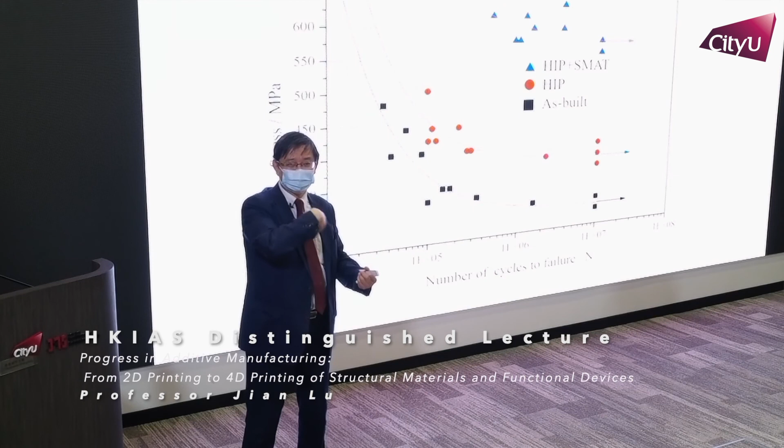What we do is we can have a thin metallic sheet material, then introduce specific residual stress distribution that takes multiple shapes, so a morphing structure. Today we print this structure using 3D printing. Some are naturally bistable, but the threshold passing force is too low, so we 3D print the structure using our technology to edit this bistable property.

So I think very soon we will have underwater systems, cars, and aircraft with morphing properties. It seems to me if you can print these multi-stable structures, you should be able to get actuations at the speed of sound, very close to it. I think it's possible to solve, to kill the turbulence. It's really possible, so we need someone crazy like Elon Musk to work with us to succeed in this kind of adventure.

The limit of your 3D printing - I think when you use two-photon absorbing material as 3D printing material, you can get down to the nanometer range. Because the record published in Nature about the freestanding bull, it's only a few microns.

The problem is the productivity. My field is structural materials, so I try to work on nano, but that should be applied for meter-size components. It's possible, we also work on this nanoscale structure printing, but the result is not yet published. What I can say is using this technology combined with super nano - because with super nano, the smallest layer can be several nanometers - then you have a very complex, super strong metallic structure.

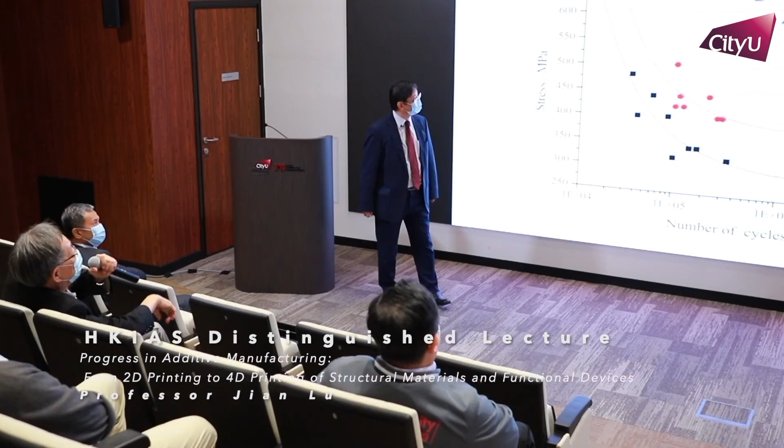Any question from Professor C.T. Liu? So for this picture, you call it 3D printing, but actually it's really simple heat treatment material, right? And by HIP plus SMAT - SMAT is a treatment, right? No, it's not heat treatment, it's a mechanical treatment. Well, it's a treatment. We just call the metallic material heat treatment, not 3D printing.

No, sorry. This material is with 3D printing. So today, if you 3D print an aerospace component, the major problem is fatigue. This starts to solve the problem of fatigue in 3D printed titanium alloy. But of course, this is a material study, it's not just 3D printed.

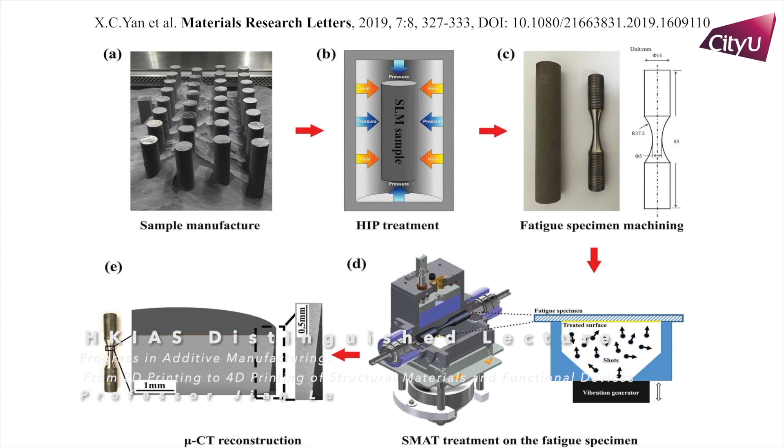3D printing only controls the shape, right? Yeah, but for the fatigue sample, you cannot do the shape directly on the sample itself. So if I do a complex shape, people say, what's the result compared to the standard fatigue test? So this is a standard fatigue sample using 3D printing plus HIP plus SMAT, then we compare with ASTM procedure, what is the fatigue strength enhancement?

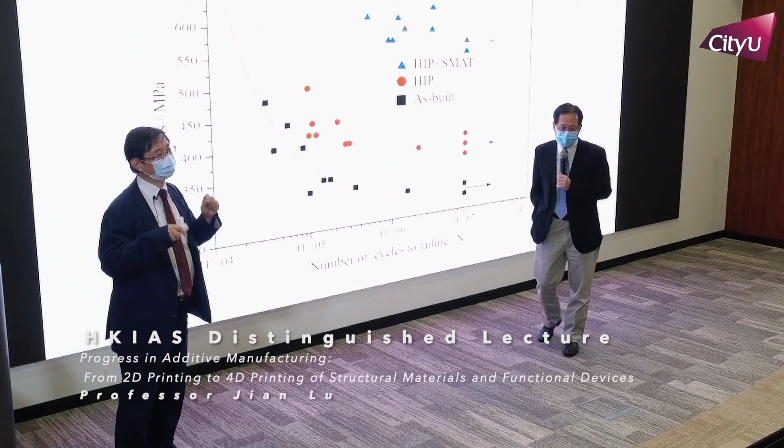So the target is to show - of course the next step can be the real component. Personally, I think the real component's fatigue life will be even higher, because a real component has stress concentration, making the 3D printed component even more sensitive to stress concentration. Using our treatment, we can introduce compressive residual stress that can drastically enhance the fatigue resistance.

Yeah, I think the major problem is productivity, and also the high precision. Today with other lithography technology, you can go to 2, 3, 5 nanometers. And this is more difficult because etching is easier - adding is more difficult than etching. With etching, you just reduce with a very small speed, then you have your structure. But probably it's possible, just not economically valid.

Okay, we have some other questions, but they're similar to what we've already asked, so probably we can stop here.